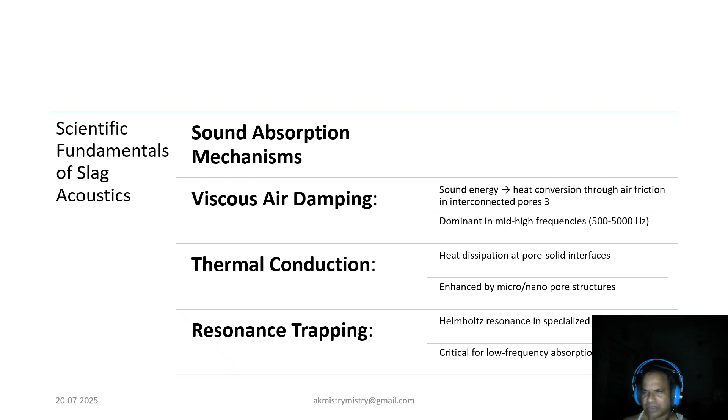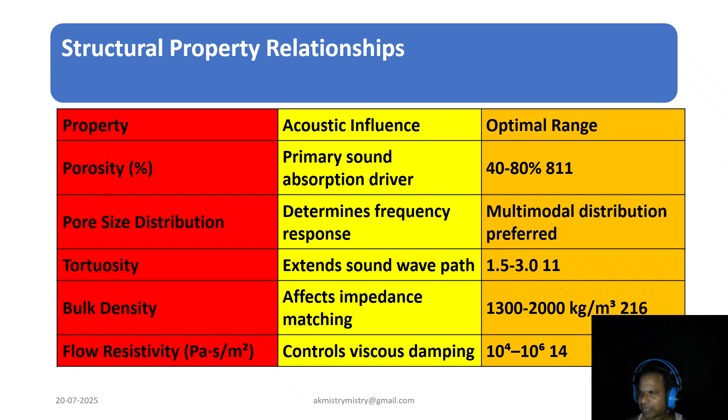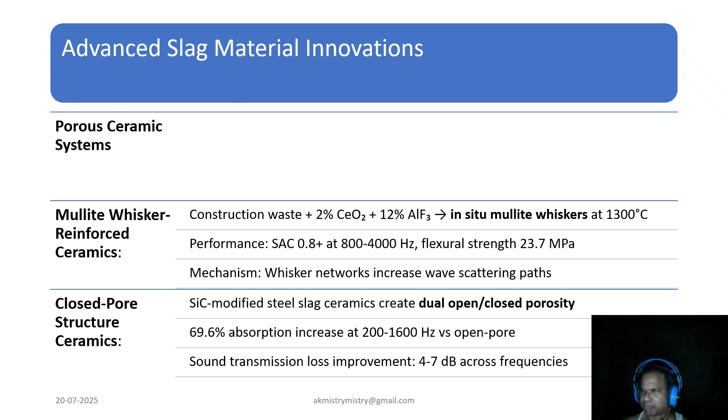A porous ceramic system. This is also a very important thing to be known by user segments. Recent breakthroughs have turned steel slag into high function ceramics. For instance, mullite whisker reinforced ceramics crafted from construction waste and additives achieve sound absorption coefficients above 0.8 at mid-high frequencies, and flexural strength of 23.7 MPa. Meanwhile, silicon carbide modified closed pore structures enhance absorption by nearly 70% in the low frequency range, while reducing sound transmission by up to 7 decibels. These ceramics combine strength and silence.

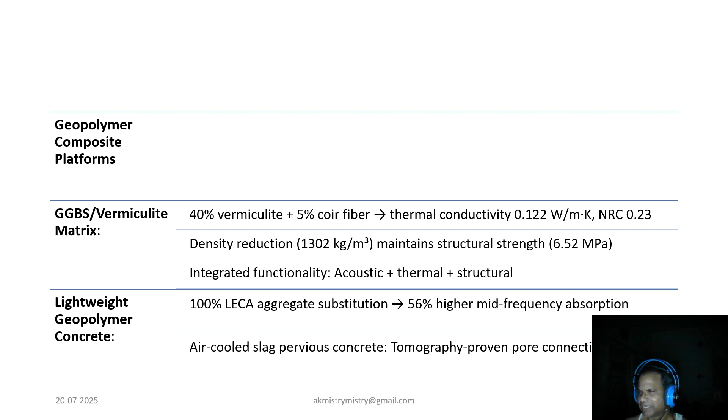Coming to the advanced slag material innovation, slag is not a one size fits all material. Its versatility shines in various innovations from lightweight geopolymer composites to pervious concretes. A matrix of GGBS and vermiculite with coir fiber achieves low thermal conductivity and dual acoustic-thermal performance. Lightweight geopolymer concrete using LECA boosts mid-frequency absorption by 56%, which is a good value, and tomography confirms pore connectivity in pervious concrete ensures both sound reduction and water infiltration. Each system serves a tailored function.

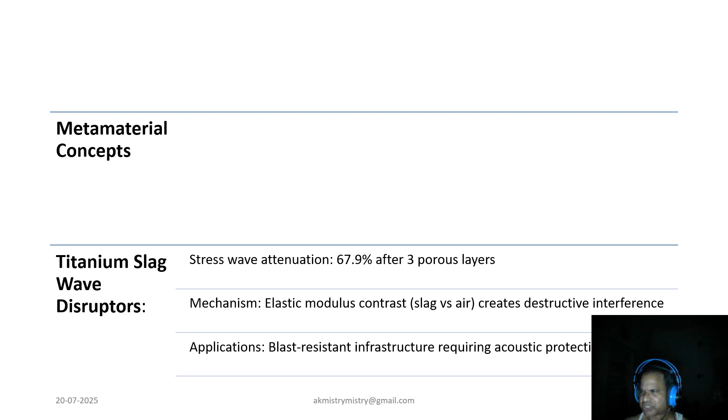Metamaterial concepts. Now, titanium slag is paving the way for acoustic metamaterials. With layered porous structures, these materials disrupt stress waves using contrast in elastic modulus, reducing wave intensity by more than 67%, almost 70%. Such designs enable blast resistant infrastructure and noise protection in high impact zones. The innovation lies not just in what slag is, but in how its geometry transforms sound behavior.

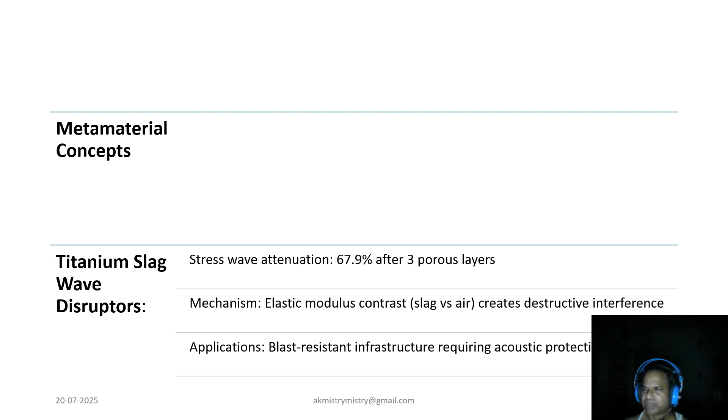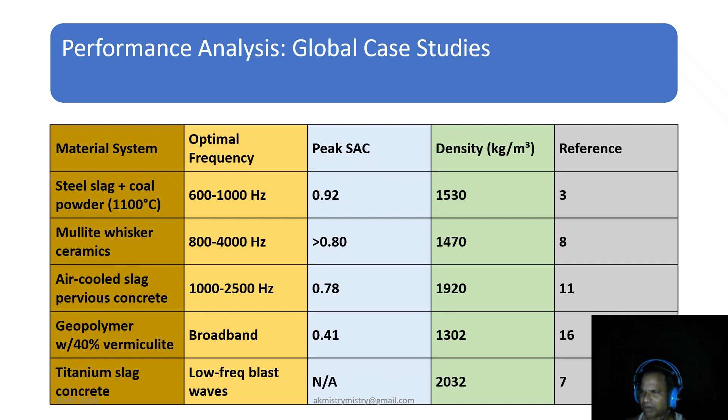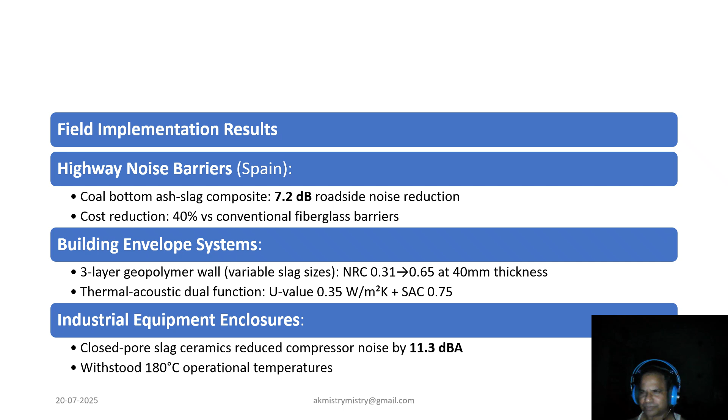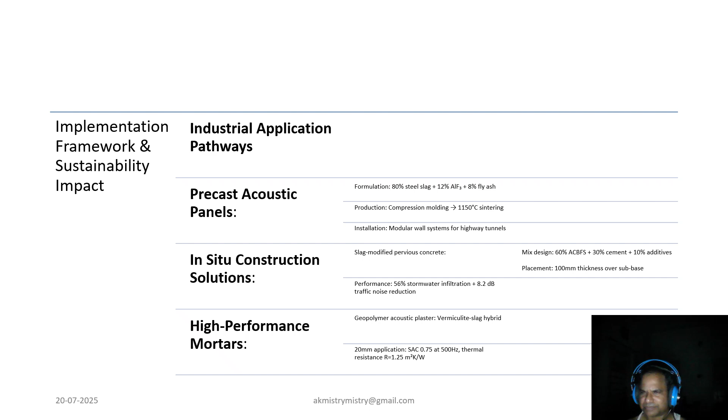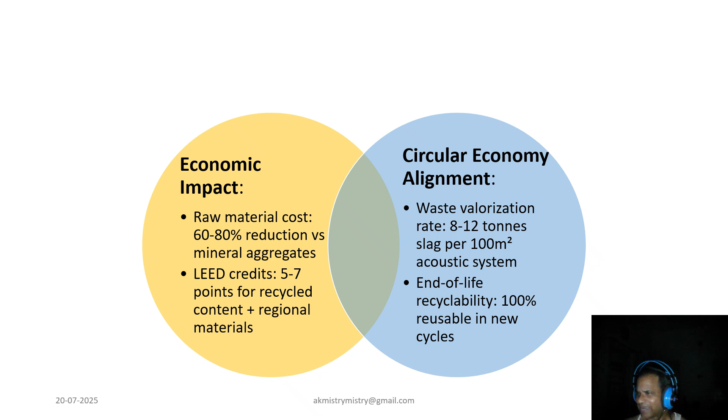Now coming to the economic impact, slag acoustics are economically compelling. They lower raw material cost by 60 to 80%, which is a good value, earn LEED credits for recycled content and regional sourcing, and align with circular economy goals. Each 100 square meter acoustic system can valorize 8 to 12 tons of slag and is 100% recyclable. That's cost saving and carbon reduction in one package, and thus it is so attractive.

Now coming to the emerging research frontier, the frontier is exciting, from microresonators in EAF slag to bio-inspired 3D printed lattices and nanoporous gels. Multifunctional systems now incorporate PCM for thermal buffering and TiO2 coatings for air purification. AI and IoT together are creating responsive acoustic systems that adapt in real time. Slag is entering the digital age.